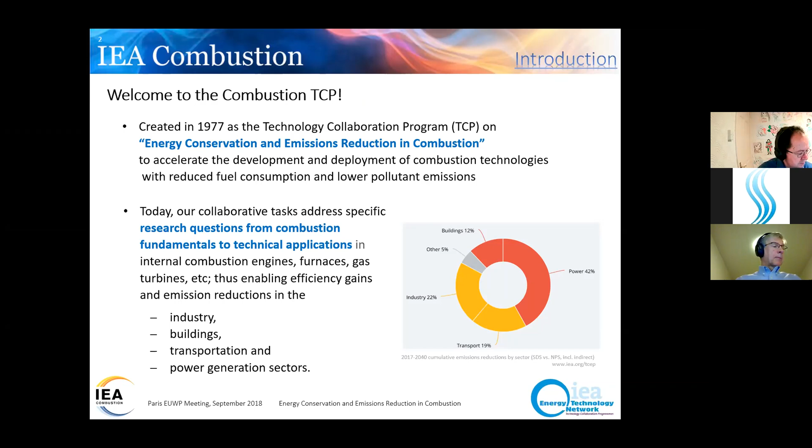And from the beginning, it has been pretty much science-oriented, not giving direct answers, but more science-oriented, and combustion related to mainly transportation, but also other applications as well, like power generation and also industry. But transportation is, from our TCP point of view, the most important. Of course, we have been thinking about IEA strategic objectives and we are looking at those as well. And we will be aligned with these objectives as well.

How then do we work in practice? We have several areas, several tasks going on, and these tasks go on several years, and we work on task sharing principles so that we are not cost sharing, and everybody has their own financing of those studies we make together. And our tasks are related to chemistry, and then sprays. Actually, sprays is something that is controlling the combustion pretty much. So that's why it's a very important controlling factor for how the combustion is really taking place in the very dynamic systems where we are making our main research.

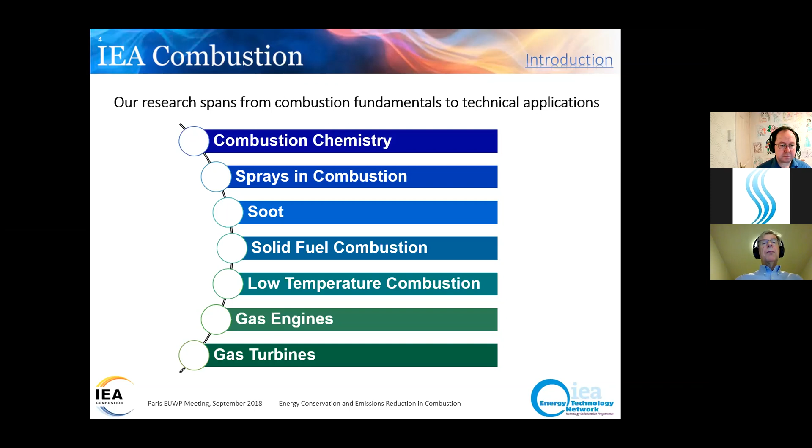We have pretty many countries involved. This is a list of all ongoing international collaboration between the countries and tasks. However, which is very sad, France is leaving our TCP and they will not continue next year, but some of the research scientists may still be involved, at least unofficially.

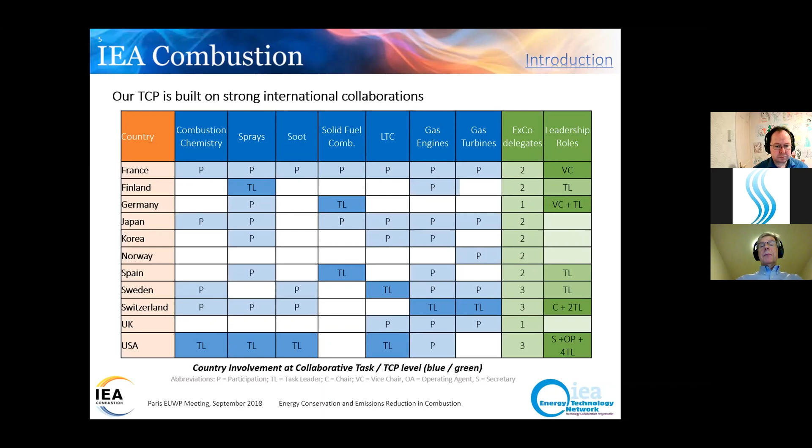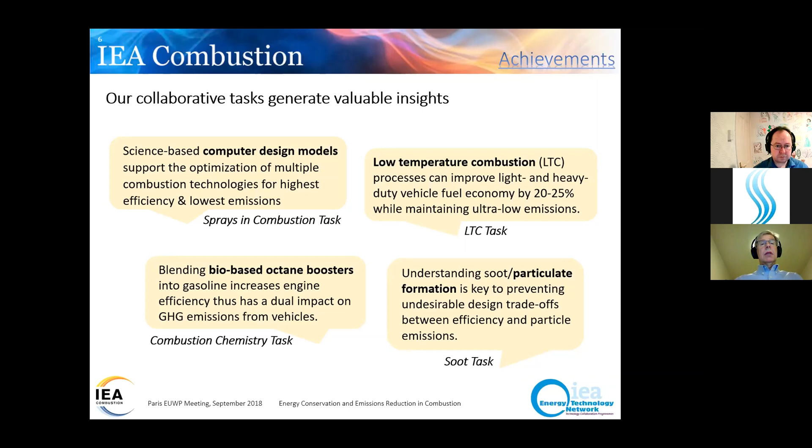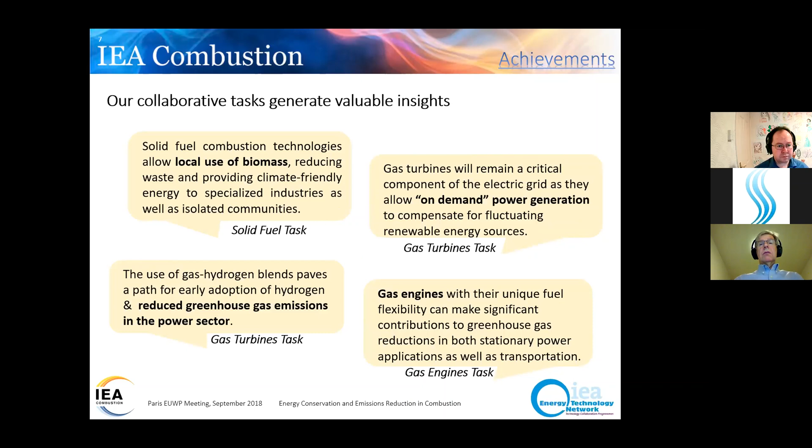So in this list, in alphabetic order: Finland, Germany, Japan, Korea, Norway, Spain, Sweden, Switzerland, UK, and USA. Then there is written down what kind of things in different tasks are being done. But I think this is maybe too detailed at the moment, but we can come to this later on during discussion if there are some questions.

One more thing that I would like to raise now about Combustion TCP, besides that we are task sharing, is that we organize every year, okay, this year it was a virtual conference, a mini conference we call the task leaders meeting. And then we physically meet, not only the ExCo members, but also the research scientists involved. This is a pretty nice tradition and helps us to communicate with each other. We typically spend 4 days together with open-minded ideas and exchange our research results with each other.

Yes, we have an executive committee like all the others, and then we have an operating agent, and this operating agent is from Sandia National Lab. Our operating agent is Dr. Paul Miles from Sandia National Laboratories. And then beside Paul, there is a secretary, and the funds we gather from countries go mainly to the cost for the secretary and some overall things, so our annual fee is not very big because we are task sharing.

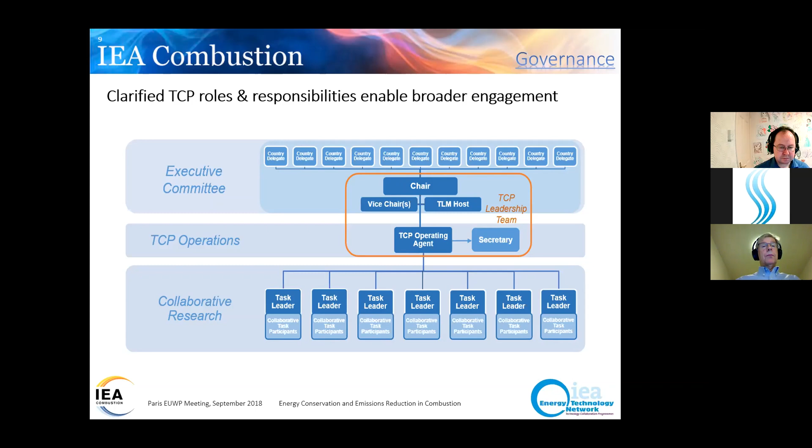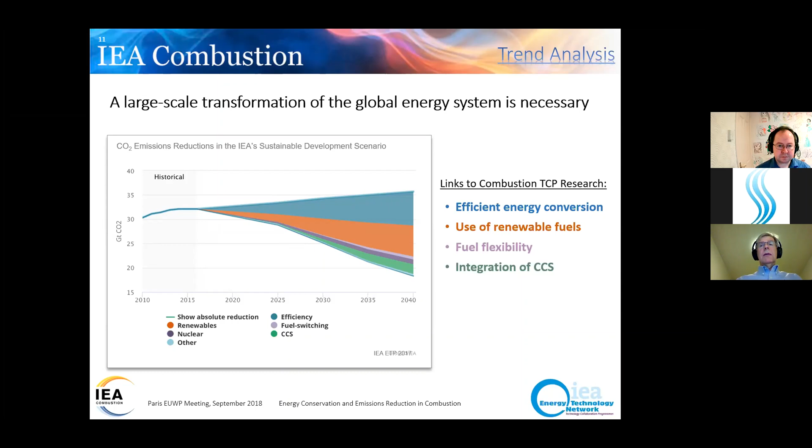Okay. Then I think this is not necessary to go in detail, but we all know that we have to mitigate greenhouse gas phenomena, and emission reduction is something that everybody has to fight for. There are pretty many ways to do it, but we have combustion still going on in many places for many years, and that's why this should be focused on as well.

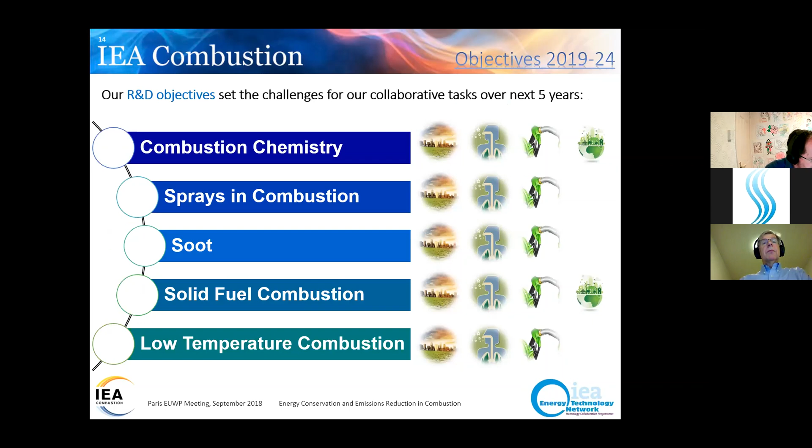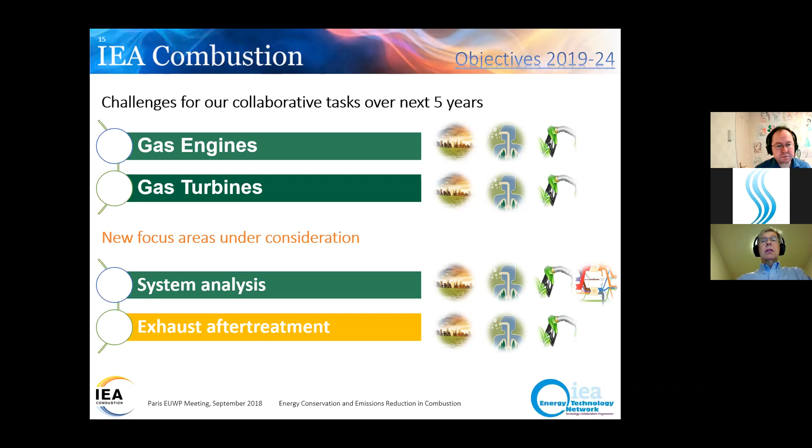And of course, our research and development objectives are like this for the future as well. But system analysis has come to our mind to widen our knowledge and also express our interest to others and join our research results with other tasks. So to make people aware what is the current status and what can be done within combustion.

And now this slide is, I think, very important. We are already interested in IEA Bioenergy, and I'm personally interested in hydrogen pretty much. It was nice to hear that you're collaborating with the Bioenergy and Hydrogen TCPs already. We have been working with IEA AMF, advanced motor fuels, several times over several years. This is more practically oriented, giving the present-day status of what can be done with present technology, while our Combustion TCP is looking more at science and what can be done in the future.

Also close to us is the IEA district heating and combined heat and power, also hybrid vehicles, and energy storage. These are all to some extent linked to us. And down there, ETSAP is mentioned. It's overlapping all these larger areas, and we see that system analysis is very important. It is a holistic way to look at things, and I believe that at least politicians should have a holistic way of looking at energy at the moment, and energy system analysis in that respect is very important. If we can somehow contribute to your task, it would be very, very nice.

Okay, these slides were actually made mainly for our 5-year extension of agreement, and there was a little bit too much material, but I hope you could pick out the main facts. Okay, then I will close these slides and jump into the next ones.

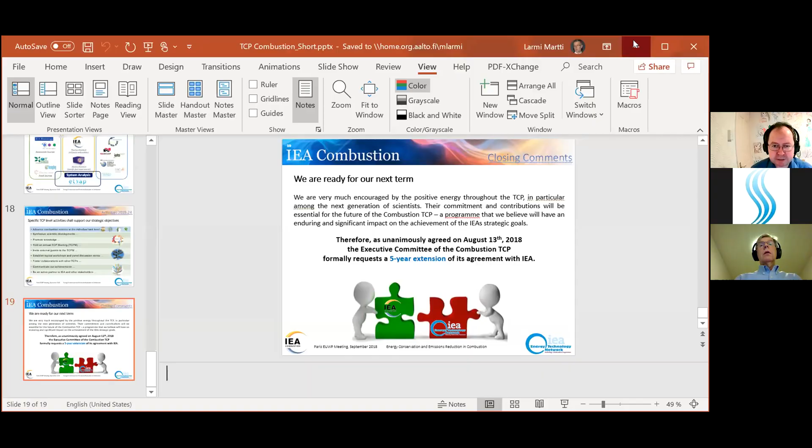Just while you're doing that, to say thank you very much, Martti. That was very useful, I think, for our discussion. I'll wait till the discussion, but I do see a number of clear areas where there might be opportunities for collaboration. Some of the things that jumped out from your slides were, as you indicated yourself, hydrogen as a shared area of focus. Hydrogen blending with gas is a very interesting one. And also the fuel economy of transport. I noticed you talked about improvements of 20 to 25%. I think this is another area perhaps we can come back to.

And solid fuel power plants, particularly, we're seeing a growing use of bioenergy with carbon capture and storage. So it would be interesting to explore those three amongst other areas. Thank you very much for that introduction. Is Yuri going to speak next? Is that the idea? Well, I have some detailed information from our last week's meeting on energy systems, and I have some more slides to share with you. But I would like to emphasize now that H2, hydrogen and hydrogen blending with natural gas, is something that is going on.

Actually, we do research on that at the moment, but I'm not prepared to show any slides at the moment. But this is something where there's a lot of effort going on at the moment.

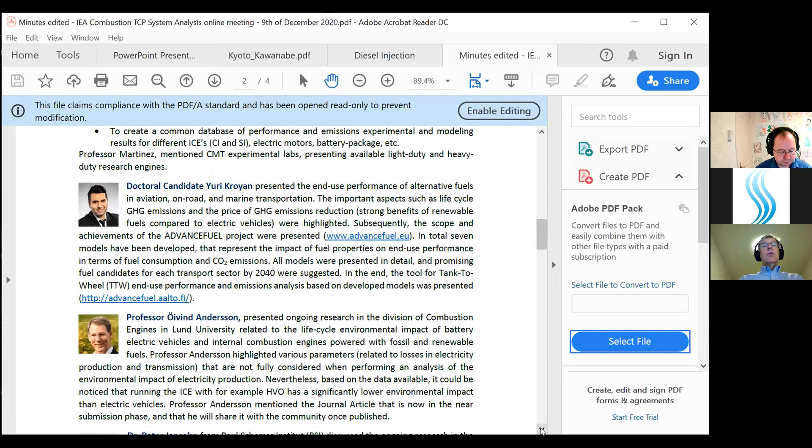Then Professor Öivind Andersson is working on these LCA things, comparing electric vehicles' greenhouse emissions with internal combustion engines with renewable fuels, and he has got pretty interesting results: internal combustion engines with renewable fuels can have lower life cycle environmental impact than electric vehicles. He's going to make a publication out of that pretty soon.

And also Dr. Peter Jansohn works with gas turbines at PSI, and he told about a lot of activities at PSI related to energy systems, and there are people in this ETSAP. Okay, that was new to me, but it is pretty nice that we have contacts from this side as well.

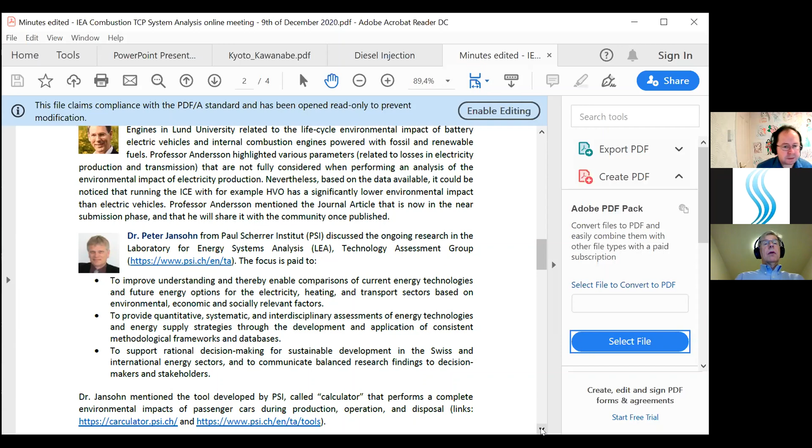Okay, then we had a talk by Aymeric Rousseau from Argonne National Lab about their modeling tools, mainly Autonomie and GREET. They are pretty powerful and versatile tools to analyze vehicle and powertrain emissions and life cycle analysis, for pretty many different powertrain configurations.

Great, thank you very much. That was very interesting. The things that jump out at me I've put up in the chat, asking people to please write in some suggestions for collaboration from other ETSAP colleagues. But some of the areas I would see, as I mentioned, would be around perhaps gas hydrogen blending, fuel economy in transport, and the solid fuel and power plants.